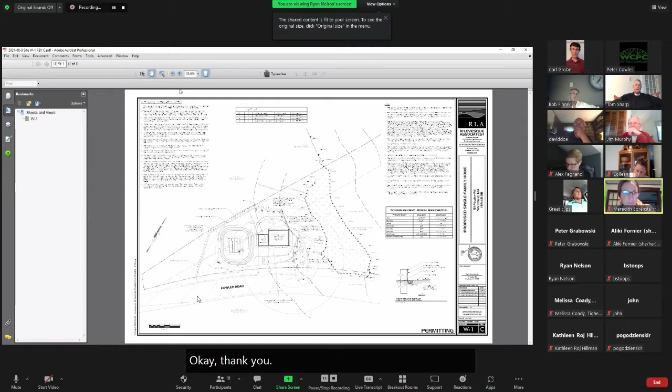with us. Sure. Hi, everyone. Ryan Nelson from R. Levesque Associates. I'd like to attempt to share my screen. I think I have to be enabled. You want it? Okay, thank you. Alrighty. As Meredith stated, a couple of revisions. I'll go over what has changed since last time.

We're showing proposed plantings within this 50-foot buffer zone within the existing hayfield. Those would be 2 red maple trees and then 5 winterberry shrubs. We're also proposing that birdhouses be installed along the 50-foot buffer zone to demarcate that area and its significance versus the rest of the yard area.

And then also boulders would be placed along the edge of field so that no future encroachment of clearing would occur beyond those boulders. And then we're also proposing that 2 conservation signs on posts displaying the typical Westfield conservation signage be installed, 1 here and then 1 here. Aside from that, nothing else has changed.

Ryan, just to get us back into thinking about this project, help me understand again, if you would, with your marker, show us the 50-foot line. Sure. Thank you. And now would you show us the silt fence line or the limit of work line? Limit of work would be hugging the 50-foot along here, and then the silt fence line is offset about 1 foot in front of the 50-foot buffer zone.

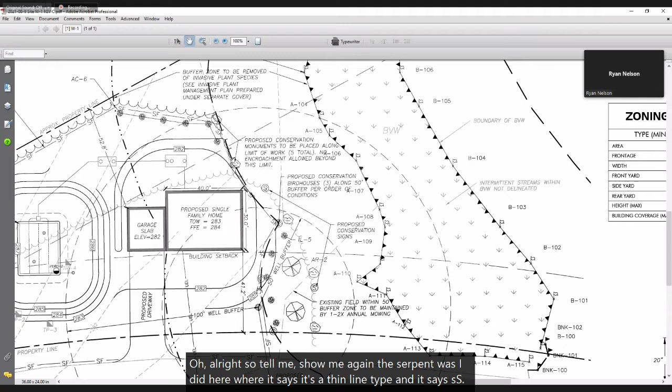I thought the silt fence line was that squiggly line to the right. This one? Yeah. No, that's the existing tree line, the existing edge of woods. Oh, all right. So show me again the silt fence. Right here. Yep, where it says, it's a thin line type and it says SF. All right. And Ryan, tell me again why it's necessary to be in this area. Why is it necessary to be in the 50-foot buffer zone?

Sure, a couple limitations. One being the septic system. This was the best site on the property to put a septic system. We're also very tight to building setbacks. This dashed line that comes to a triangular point here is the building setback based on the property lines. So we've wedged the house as far as we can to the left to fit within that. There's really no other place we can put the house.

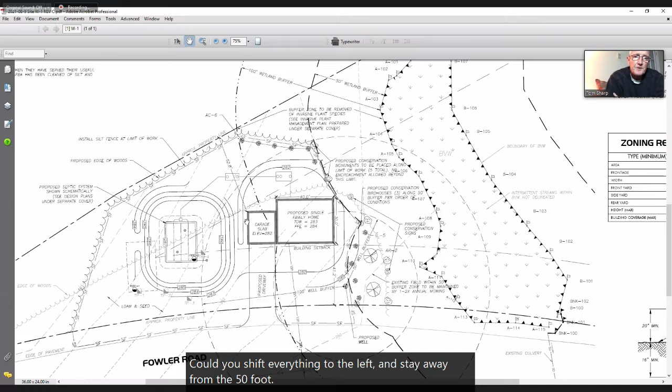I don't know much at all about septic design, but are there not systems that are smaller, probably more expensive, that would not require that amount of space? Could you shift everything to the left and stay away from the 50-foot buffer zone? No, because we run into this triangular shaped building setback. Well, first, go back to the first question. Are there systems that could have been designed that would take up less space?

And were they considered? Yes, I'm sure there are advanced systems that would have a smaller footprint. But I'm not so sure that would help us. None of the impacts related to the septic system are in the buffer zone. That's all outside and upland.

All right. And then in DEP's comments, he asked the question, is there already a home on this lot? And I think you responded that yes, there is. Are there already 2 homes on this lot? No, there's only one. Let me see if I can share a GIS image. Hold on.

So this is the field we're talking about right now, right here. So there's an existing house located here. There's a pretty steep drop off from this tree line down to the stream in the wetlands. So there's really no viable area to put anything on this side of the wetland. And plus that would be all tree clearing within the buffer zone in order to do anything over there.

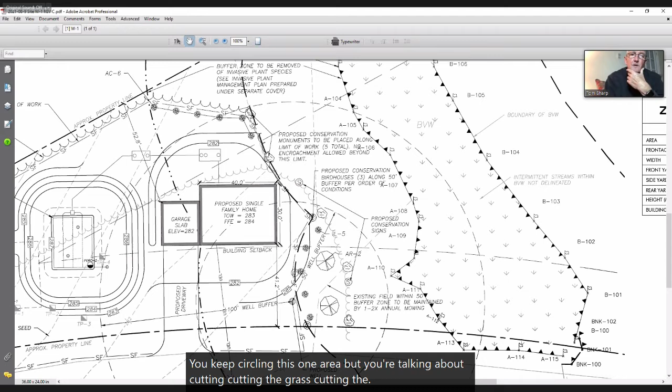And you or the new property owners would like to be able to cut this twice a year for the entire swath, right? All the way up to the top of the page? You keep circling this one area, but you're talking about cutting the grass, cutting whatever grows there. So down the existing field area within the 50-foot buffer zone. So if I was to draw it, it would be that area right there.

Why not the whole area? Why doesn't the homeowner have the same concerns with tall vegetation to the northeast of his property? This is existing woods, so this is beyond the limits of the field. Over here, this is all woods and will remain woods. Right. All right, I'll pause. Thank you, Ryan, for your answers. Sure, not a problem. Other questions?

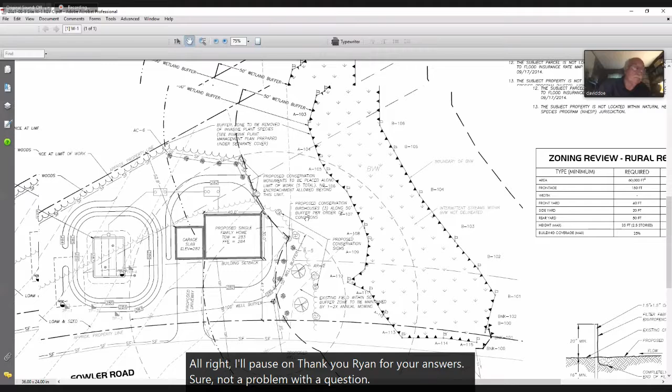I have a question, Mr. Chair. Yes. Ryan, why aren't the conservation signs along the 50-foot buffer? Is that because they want to continue to mow it? That's correct. Yeah, it would have some sort of conditional maintenance. I mean, we can put them wherever you guys like. It just seems a little confusing that we don't really want them encroaching on the 50-foot, but the conservation signs won't be on the 50-foot line.

But will the birdhouses be on the 50-foot line? Yes, that's kind of what I gathered from your email. That's what I was showing. So these markers with a C would be the birdhouse locations.

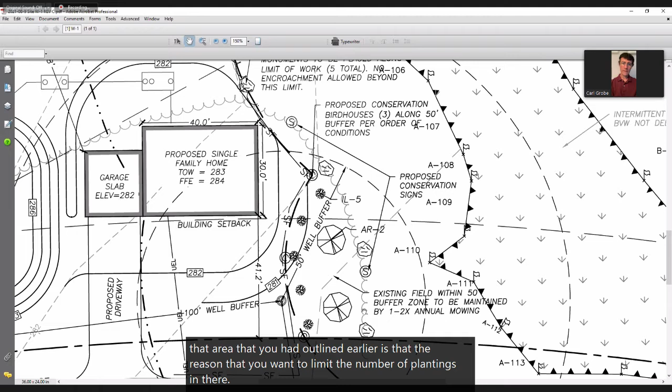I guess I had another question as well, if I may. I'm wondering, is the interest in mowing semi-annually that area that you had outlined earlier, is that the reason that you want to limit the number of plantings in there? No, I mean, it's not a very large area. If I was to give you a dimension here, 20.

It's about 25 feet across at the widest part and about 55 feet long. So that's about 1,375 square feet. And we have 5 shrubs and 2 trees. So I wouldn't call it sparse, but.

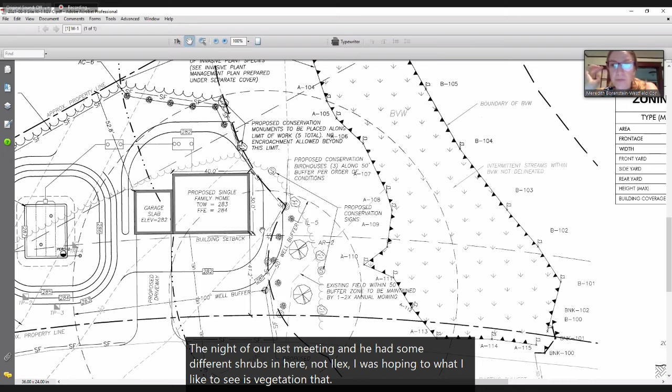Okay. What about the particular species that are in there? I know, Meredith, you had some thoughts on some other types of vegetation that might go in there. Yeah, originally, Ryan had sent this plan the night of our last meeting, and he had some different shrubs in here, not ilex. What I like to see is vegetation that is already on the site planted, not just a random wetland plant that may or may not do well on the site.

Usually if something is already growing at the site, then other plants like that will continue to grow, be okay there. Plus, I think it was serviceberry that he had in that area, and it just seemed like a lot of one type of species. So I suggested some others, and Ryan updated the plan, and now he has 5 winterberry shrubs and 2 red maple trees.

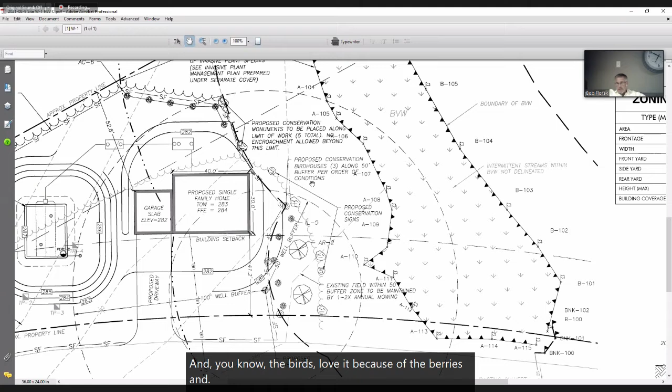Okay. So you're reasonably happy with that selection? Yeah, I think it's at least a little bit more diverse than just serviceberry. And again, Meredith, excuse me, as you get to the back, it gets more and more wet because the brook's back there. So as our discussion was, winterberry does real well in wet areas. And, you know, the birds love it because of the berries, and I just think it's going to work better. Yeah, and it's pretty in the winter.

My only other concern is the homeowner being able to find winterberry at a nursery. But I guess hopefully the contractor will take care of that for them. And my other suggestions were dogwood or elderberry, because I saw both of those out there when we did the site visit. Okay, other questions?

Hey, Alex, at our last meeting, when we kind of wrapped this up, it was your suggestion that perhaps shrubs be considered, and to the proponents' credit, thank you, they have been added. Alex, did you picture, when you were making that suggestion, or even now, that area being mowed or unmowed? I believe 2 weeks ago, you were thinking that it would not be cut, but I may not have understood. No, I think your recollection's right, Tom.

My suggestion was plant it, let it go back to the 50 foot as a compromise. If it's a low growth shrub, we didn't talk about the air circulation issue last meeting, but as long as it wasn't thick, mature forest, you wouldn't be totally suffocating the house. But no, I was envisioning that being the compromise. As was I. Because, you know, Ryan, the argument that it's mowed as a meadow now, great. Well, there's not a house there now either.

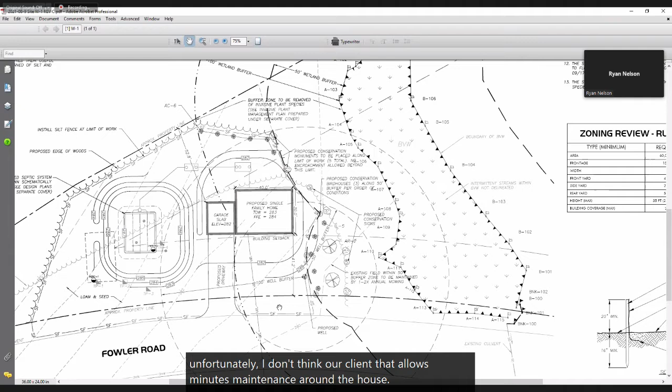Well, could he take the garage off then and slide the house over? I mean, where are we here? We're asking you to put some shrubs in. What's shown is as tight and as condensed as we can get for what he's looking to do.

All right, well I have a question then, Ryan. There are other options on the septic systems. Has he looked into that? Right, but that's kind of independent of the constraints of the house. We can't shift the house due to the building setbacks, not the septic system. You could shift it with a zoning variance.

Is that true? Can you get a variance on the setbacks? You can apply for one. Yeah.

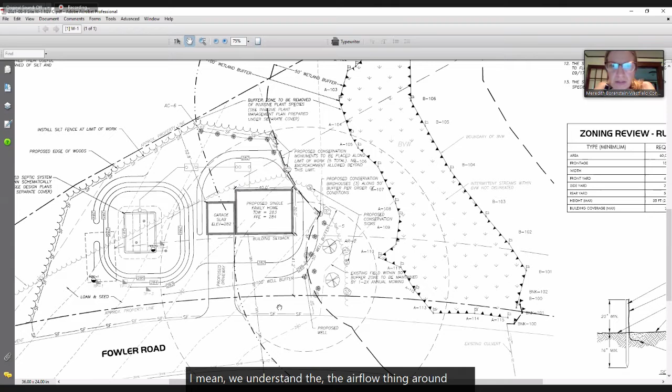I mean, we understand the airflow thing around the house. Wouldn't it be more of a concern that the back corner of the house is basically at the edge of a forested area? Yeah, and that's exactly why we're requesting to mow it one to two times a year, this strip right here. That's still within the 50.

And then this would be cleared. This is from 50 to 100. That's the existing tree line. So this would be cleared.

Ryan, one of the problems I've foreseen, and I think most of us agree, is that this area will be so hard to police. It will be so difficult for any of us, or our successors, or the people that follow us. It's just going to be unresistible - the guy's going to be out there with his tractor. He's going to cut this, maybe not the first year, maybe not the second year, but eventually I fear the boulders and the birdhouses will be ignored. It's so much clearer, so much easier if we just say stay away, keep 50 feet away.

That provides no confusion. I think it should remain natural, not cut twice a year. I would certainly feel more comfortable if that were done as well. It was my understanding as well that that area we keep talking about was in fact to go back to a natural state rather than being mowed twice a year.

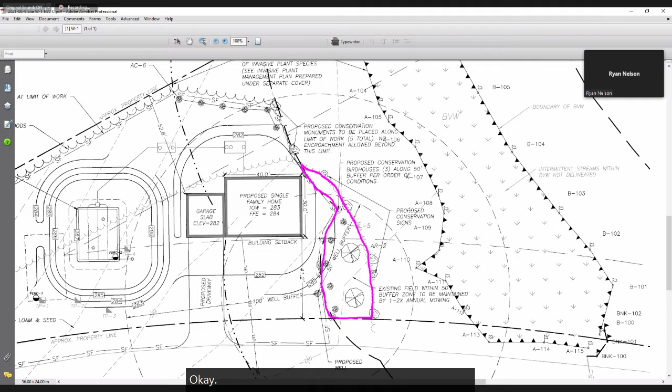Ryan, would you put with your colored indicator the area they wanted to mow again? Okay, now it looks like the most important area is up on the upper left, right next to the corner of the house. And then that remains pretty narrow as you go down to the right - you see a constriction there, and then it widens as it comes down on your paper.

To the commission, we're looking for some accommodation here. What if they were allowed to mow the small piece that goes up to the left, to the corner of the house, and then the bottom part - the larger piece from that constriction downward - just leave that one and not mow that. Because you can't have a hayfield within a foot of the corner of the house, and that doesn't seem practical if we're going to approve this.

I'm fine with that, Mr. Chair. I'm fine with that, Mr. Chair. Yeah, and we have to remember that this is still going to be vegetated. Right. I think we're getting some shrub plantings.

We could get more. I mean, usually if you were going to plant a whole area, wouldn't you divide the area by how much diameter each shrub would take up? So we could increase the shrubs, but like I said, ultimately this area is still going to be vegetated. I think we're still providing protection to the wetlands.

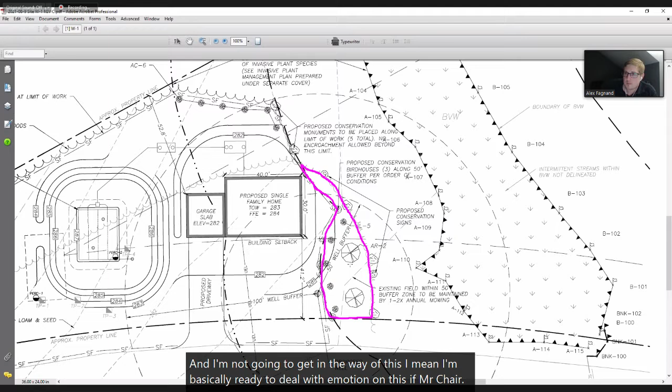I'm not going to get in the way of this. I'm basically ready to deal with a motion on this, Mr. Chair. Ryan, you can see where we're heading as far as the area that could be mowed and the other that shouldn't be mowed.

I understand what you're saying, but I'm not quite sure the logic behind it. We're improving existing conditions.

How do you mean that, Ryan? What's an improvement? We're adding shrubs and putting a limitation on how often it can be mowed. Right now, the farmer could go out and till this whole thing with no silt fence, no erosion controls. He has every right to do that.

The future use will not be doing that, with no house. I mean, come on, he's not gonna till that area. There's no way he's gonna till. We don't know that. He has the right to, I know, but he's not gonna do it.

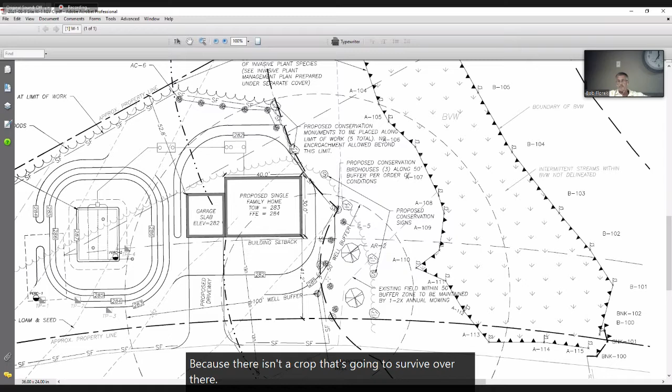Well, that's the same speculation as the future homeowner cutting beyond what he's supposed to. Because there isn't a crop that's gonna survive over there. No, that was just the worst case scenario.

Mr. Chairman, it sounds like we've got two choices. Either we ask Ryan to go back and redesign the area that'll be cut, take your suggestion, make it a much smaller, twice a year cutting up in that northeast corner, and maybe also give Ryan a chance to examine alternative septic systems.

Ryan, I don't understand why you couldn't slide everything to the left. You said there's something about setbacks. Tom, there's zoning dimensional setbacks where you can't place a structure beyond a certain distance from the front property line, side and rear property lines. So that offset projection is this dashed line and we're wedged in that sliver.

We can't go any farther to the left without encroaching. The northern offset, what is that? I understand you have to be so far from the road. What do you have to be so far from your neighbor's property? The rear yard, which is the rear property line, you have to be a minimum of 50 feet in a rural residential zone. So that would be this dimension from this property line to that offset, which is the building setback line.

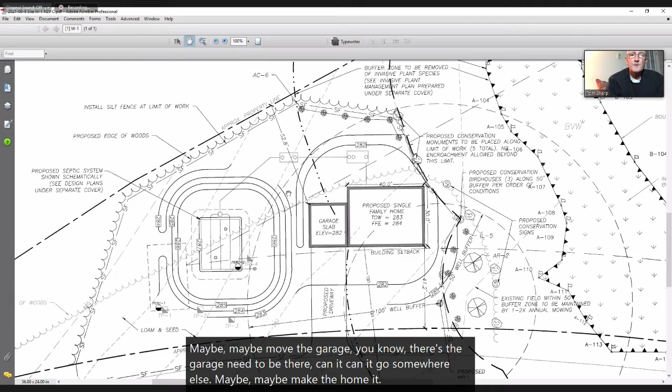Yes. All right, well, if you feel you've examined the septic thoroughly and it's not an acceptable alternative, then I'll agree with that. Maybe move the garage. Does the garage need to be there? Can it go somewhere else? Maybe make the home... it seems this could be resolved fairly easily.

I don't know why. Because the guy wants more lawn? Is that what we're talking about? He wants to have more lawn? We do this day in and day out with all these design factors. There's no other place to put this house on this property. This is the most condensed layout we can do. This is what we're proposing.

Is that city water or is it gonna be well? It's a well. The proposed well is located right here. Okay.

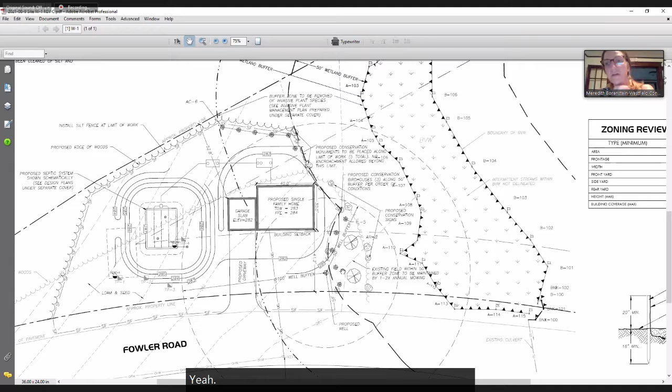I mean, we can approve it with special conditions, and I guess if the homeowner, Meredith, if that's correct, can appeal what we've set in our special conditions? Yeah, there's an appeal period. Okay, if they don't like what we permit.

Mr. Chair? Yes. Hey, I just wanted to say that with the garage, I know there was some concern with that, and they are maxed at that 52 feet for the rear line. If they did swap it to the other side, we actually wouldn't want that because it'll be closer to the buffer zone. They'll be right on the edge with the driveway.

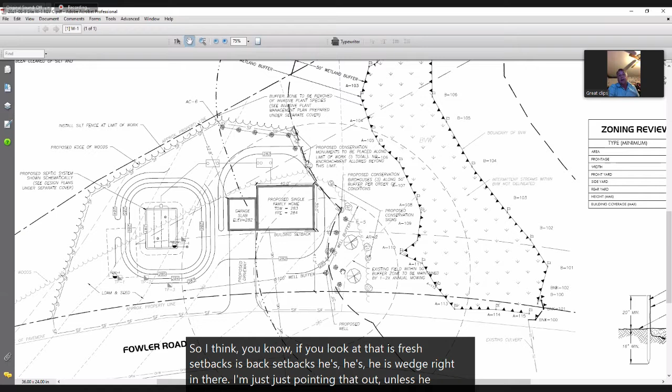You can have oil spills or plowing, you know, which would put it into the 50 on the other side of the house. So if you look at that, his front setbacks, his back setbacks, he is wedged right in there. Just pointing it out, unless he doesn't do a garage. But just pointing it out.

I think to the commission, we've gone as far as we can go, and it depends on what we want to set as conditions, and then again, the homeowner can agree with it, or they can appeal it and go from there. But I think we've discussed this enough. The house is where it has to be because of the setbacks on the property.

I agree, I totally agree. Let's move on. Okay, first, any comments or questions from the audience on this particular project?

Seeing none, I'll entertain a motion to close the public hearing. So moved. Do we have a second? I'll be the second. All right, any further discussion?

Seeing none, all in favor? Carl, yes. Tim, yep. Alex, yes. Bob, yes. Cliff? Yes. I'll vote yes as well. I'll also vote yes to close.

Okay, thank you. Meredith, why don't you go through the conditions. I'm not sure if I can get them up on this laptop.

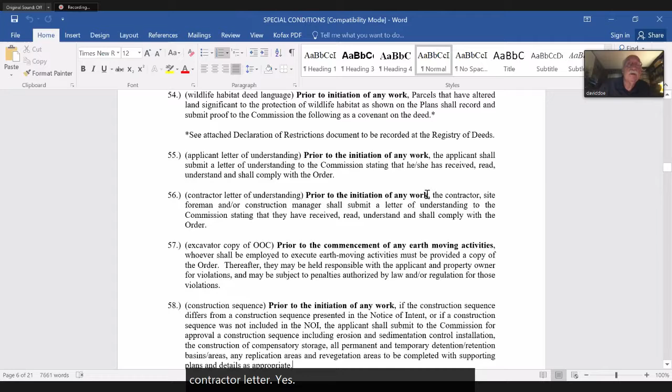Excavator copy, yes. Construction sequence, yes. Erosion controls, number 59, yes. Pre-construction meeting, yes, probably important, that's going to be important with this one. Let me keep going. Emergency contact information, yes. 48-hour notice, yes.

There is a septic system, so the Title V should be submitted, correct? Yes, we will need, I think we can ask for an approved septic plan. Okay, what they have on there is just where they're proposing it, it's not the actual septic design.

Okay, so yes, there's no water quality certification for this one, correct. Permanent markers, as indicated on the plan. Now, there was a question about the boulders being off the 50-foot line. Is that acceptable to the commission? Do you want to put them on the 50-foot line?

I think they should go on the 50-foot line. I agree with that. Okay, so make a notation, that's different from what's on the plan.

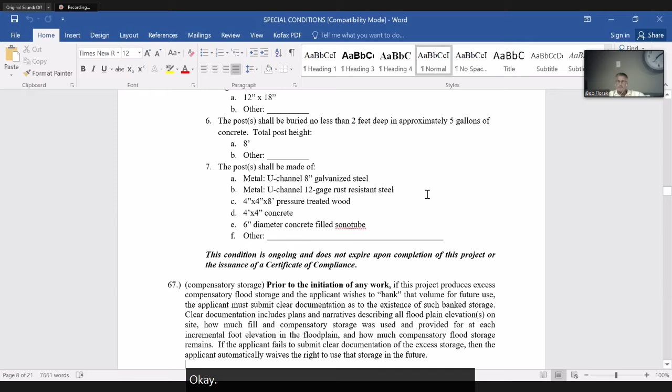There's no comp storage, no basins. We might circle that just because they might need to do that during construction to manage stormwater, but it's not required. Okay, so circle 68 then.

So, tag trees, they're not tagging trees, are they? Well, they're clearing up to the 50-foot line in the back where it's currently forested.

We could either do that by putting the silt fence in ahead of time at the 50, and I could approve it that way, or let's do tag. Okay, I'll just make a note. The limit of work is the silt fence line, so they don't need to tag every tree, right.

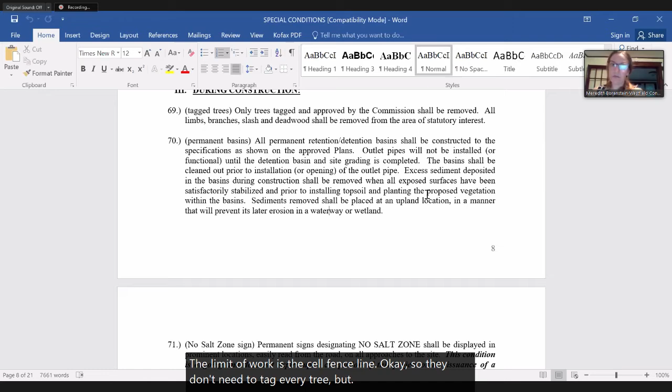So, no permanent basins. No salt, I don't think that's needed, this is a pretty small driveway and single family homes are exempt from stormwater standards. All right, so we don't have to worry about low flow either, so none of that.

I don't know, liquid fertilizer, you're not inside the buffer zone, well, right? They're in the 100-foot buffer zone, the whole house and lawn will be in the buffer zone. So how about we limit, I mean, we can say no lawn fertilizer. I don't know, there's no way of me preventing that, but that's not enforceable, but keep it outside the 50. Yeah, okay.

Okay, erosion controls, straw bales only. Installation number 75, yes. Stockpile 76, yes. Avoid heavy rain, yes.

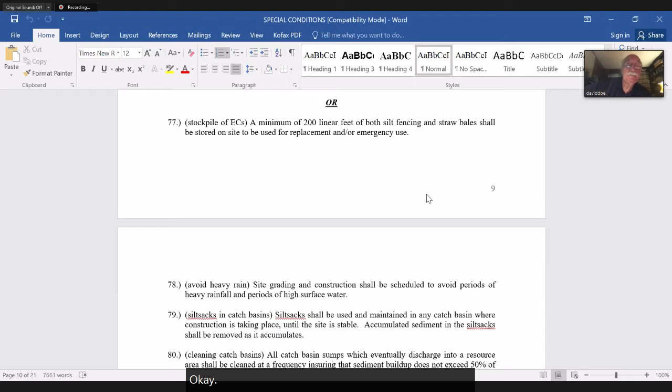There's no catch basins, no. Okay, no grease, oh sorry, no grease traps, no. Okay, there's no stormwater structures, no. Okay, so just keep working.

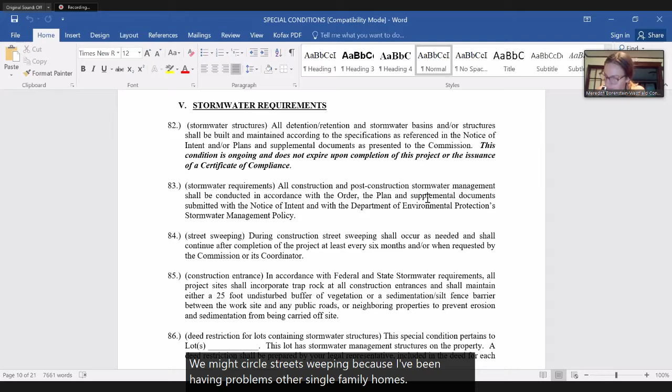We might circle street sweeping because I've been having problems with other single family homes, but that's normal construction practice to keep sediment in the limit of work. Okay, look at that one.

And they should have, I don't think that I saw that on the plan, they really should have a construction entrance, especially if they have to bring a lot of soil in for the septic. Okay, let's do that one too.

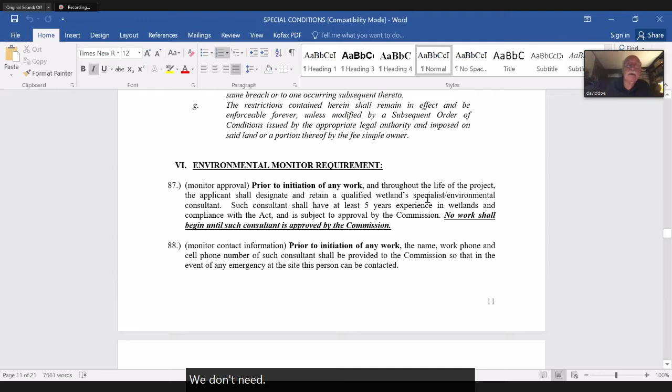All right, there's no formal stormwater structures, we don't need a monitor. There's no dewatering, we hope not. No dredging. There's no replication.

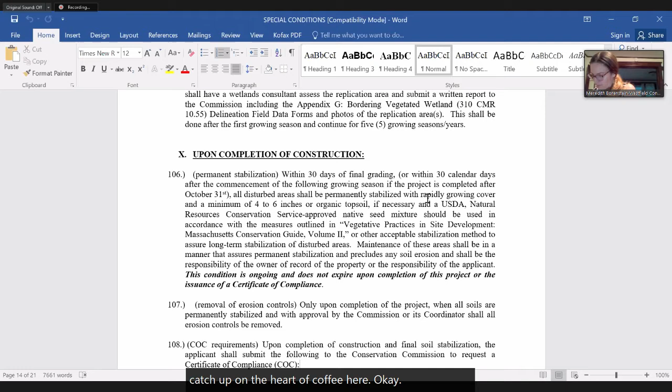Stabilization, yeah. We want that. Hold on. Let me catch up on the hard copy here. Okay. Okay. Oops. 107, yes. 106, yeah. 106. Yep. 108, yes. Okay. Future buyers, yes.

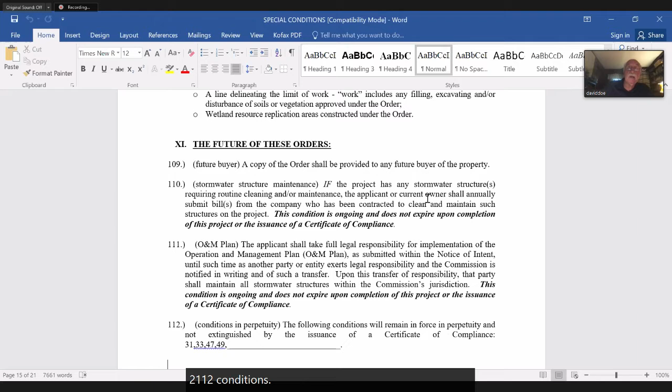Okay, stormwater structures, we don't need that one. We don't need an operation and management plan, do we? No, because that's usually for stormwater management. 112 conditions in perpetuity, yes. Yes. Okay, and a bond?

Jim? Well, I'm going to defer to you folks because you're more aware of the project than I am, and I was also not at the last meeting. So I really can't contribute on this. I always like to try to go backwards when we're trying to think of a bond and envision what it would cost the city to fix things if things got messed up and everyone walked away from it. In this case, I don't see much that could happen bad.

You know, he is taking trees down within the 100 foot. So maybe he goes in there and cuts a dozen trees and goes belly up or decides to build a house somewhere else. We'd want to at least try to replace some of those trees. So I'm thinking something nominal, Jim, maybe like $2,000-$3,000. I don't know how the rest of you feel about that. It may be too low. 3 sounds okay to me. How about the commission?

Yeah, I guess to pitch in, the only other sort of bad thing could be potentially digging the foundation and laying the foundation in and then walking away, in which case you'd need to remove the foundation. I don't know if that adds to it significantly or not. How about 4 then? You're right, Carl. You're right. We would want to do that because it is within the 100 foot buffer.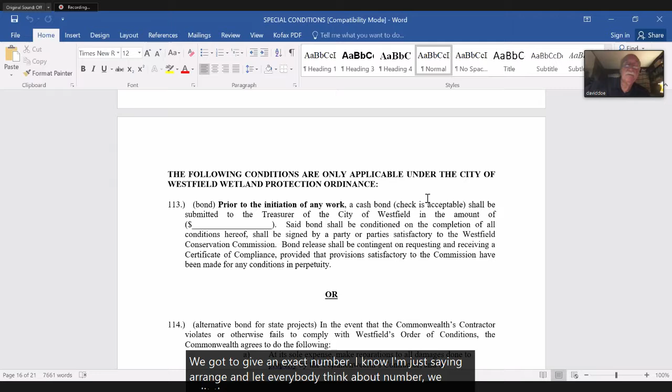How about a 3 to 5 range? Well, you got to give an exact number. I know, I'm just saying a range and let everybody think about the number. Oh, you split the difference at 4. 4 sounds all right to me, yeah. I'm good. Okay. All right, so that'll be 4, Meredith. Okay. Then we've got, you indicated some special conditions.

Yes, I was going to suggest, you know, if they're going to be doing herbicide treatment out there for the invasive species work, that I meet with them and we get a name and contact number. You know, it has to be a licensed professional to do that type of work. Okay. And I did take this from the invasive species plan that LeVec provided. So maybe we can just reference that the invasive species management plan will be followed. Okay, and I can include it in the order. All right, thank you. Okay, any other conditions from the commission?

Are we approving this with no mowing within the 50, except, how do we word that around the house? So I'd be okay with periodic mowing around the house, but the larger chunk within the 50 that we're planting trees and shrubs in, I would like to have left alone. Okay, I think that's what the commission was looking at. As Ryan drew it, there's a narrow region up near the house, and then it comes to a sort of a neck, and then as you move towards the road, it widens out. And I think from the neck south is the region we want left alone after they put in the shrubs and the trees. Mhm.

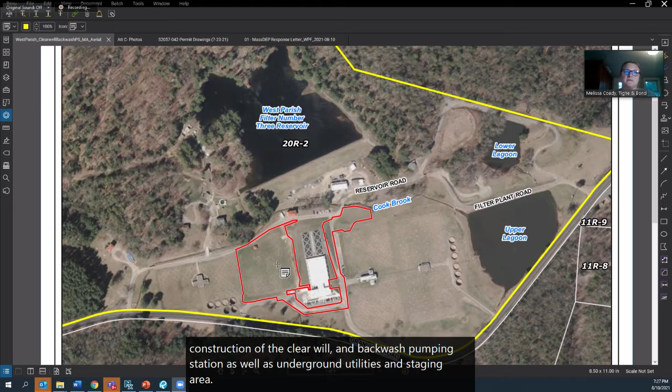So again, to orient the commission, Cook Brook is the wetland resource area that flows through the site, a perennial stream. It typically flows into the upper lagoon and then down into the lower lagoon before it discharges from the site and returns to its stream channel. So within the site and within the proposed limits of work, we have work within the 200-foot riverfront area of Cook Brook, as well as the 100-foot inner riparian zone, which overlaps in this vicinity with the 100-foot buffer zone as well. So anything described in the buffer zone is within the first 100 feet of riverfront area.

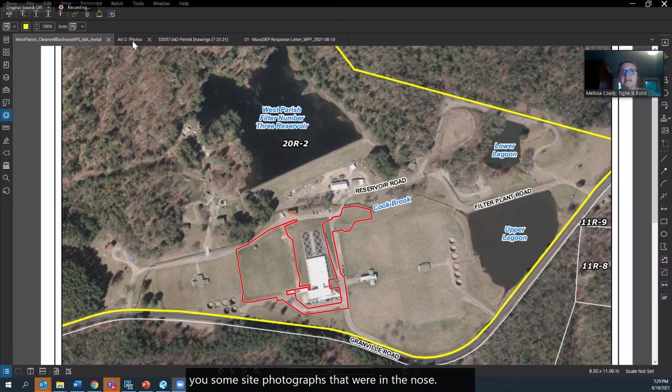And as the commission is familiar, this is a historically developed property. It's been well over 100 years that it's been developed and in service as a drinking water treatment plant. And as Bob described, this is providing service to roughly 250,000 people. So critical infrastructure is an accurate description. So we'll do some site photographs that were in the notice of intent just to give that particular view, and then I'll go to the project drawings to talk about the proposed activities.

So this is an existing paved access road. I'm going to bounce back here. So this is right here. And this little brown square is this building right here. And that's the existing stairwell building that is going to be demolished. And this, what appears to be maintained lawn with all these manhole covers in it, is actually the top of the sand filter beds. And that's this area here. These beds, as Bob described, were taken out of service in the early 70s when the rapid sand filters were constructed. The proposal includes demolishing the entire area, the entire beds 1, 2, and 3.

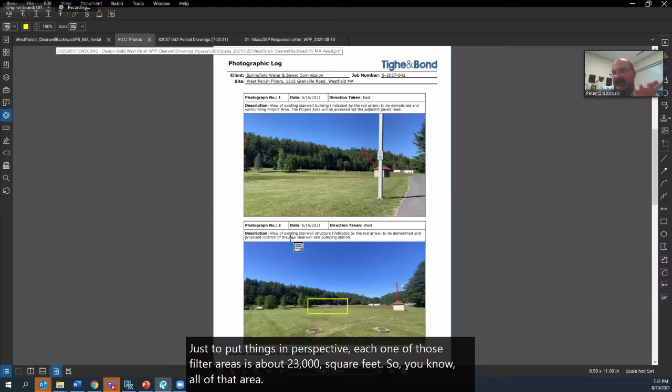So what you don't have an appreciation for, and I certainly didn't before this project, was that about 18 inches below the maintained lawn area is the top of the concrete structure. So it's not natural native soil beneath this. It's man-made infrastructure. It's generally impervious, and those concrete structures are filled with sand, which was the filter media. And just to put things in perspective, each one of those filter areas is about 23,000 square feet. So all of that area that consists of those 3 old filters takes up quite a bit of area that's impervious after you get below that 18 inches of green roof. Thank you, Peter. Okay.

And then this area here is maintained lawn with underground utilities, and that is roughly this area where the contractor has identified a need for staging. And then what you see outside resource area is where the clear well and backwash pumping station will be constructed, as well as piping, the linear pathway for piping and connections to the building here.

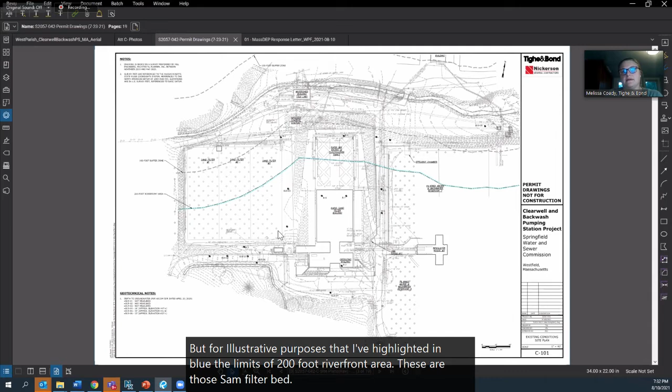So I will jump to the permit drawings. I think the aerial photos make it a little easier to appreciate where you are on the site. But for illustrative purposes, I've highlighted in blue the limits of 200-foot riverfront area. These are those sand filter beds that will be demolished. This is the existing rapid sand filter building, and Cook Brook is this feature on the drawings here.

Okay. That's a sheet layout. So again, this just demonstrates the limits of demolition and erosion and sedimentation control barriers. So as you can see, aside from an erosion control barrier on the far side of the existing paved access road, work is limited in this area to the south side of the existing access road. And again, this shows the limits of excavation or disturbance to construct underground utilities. And the staging and laydown.

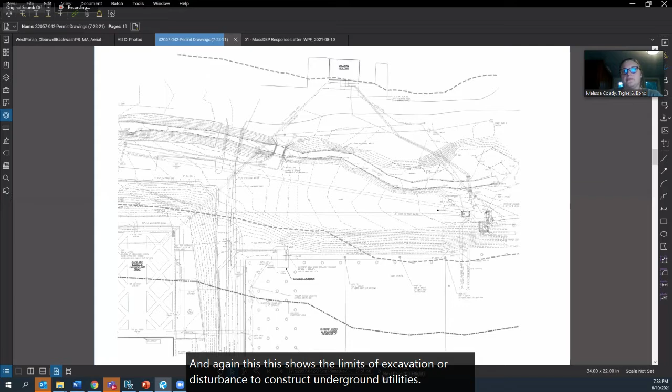And I would just like to get to this drawing here, which shows the clear well and backwash pumping station. So as you can see, this line highlighted in blue again represents the limits of 200-foot riverfront area. So the building has been sited outside the 200-foot riverfront area. And the entire footprint of the sand filter beds is within this vicinity. Those will go from being essentially impervious to pervious.

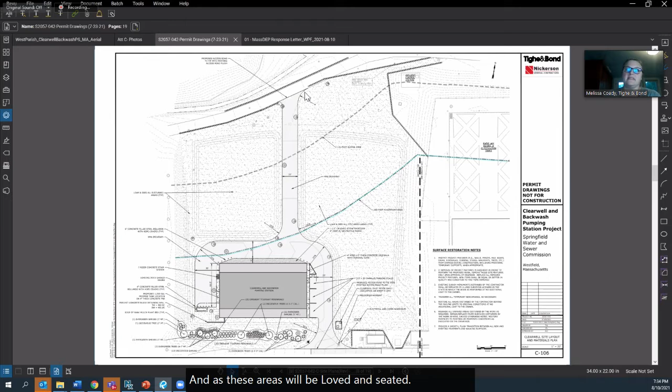So the project will have a net decrease in impervious area. And these areas will be loamed and seeded. But there will be access paved to come in so that there is loop access here. Thank you.

If we could, I just would like to touch on the riverfront area improvements that are proposed. Thanks. As well as the stormwater management system, which is an underground infiltration system at the end of a pre-treatment train that includes a proprietary stormwater unit as well as deep sump hooded catch basins. So the project qualifies as stormwater redevelopment, which, as the commission may be familiar, requires that standards are met to the maximum extent practicable. In this case, the standards were completely satisfied.

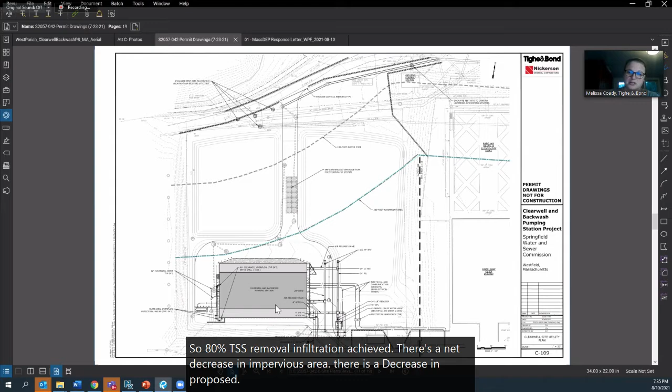So 80% TSS removal, infiltration is achieved. There's a net decrease in impervious area. There is a decrease in proposed peak discharge rates for, let me get this right, the 2, 10, 25, and 100-year storms. And there are no new point source discharges, so they're tying into the existing system.

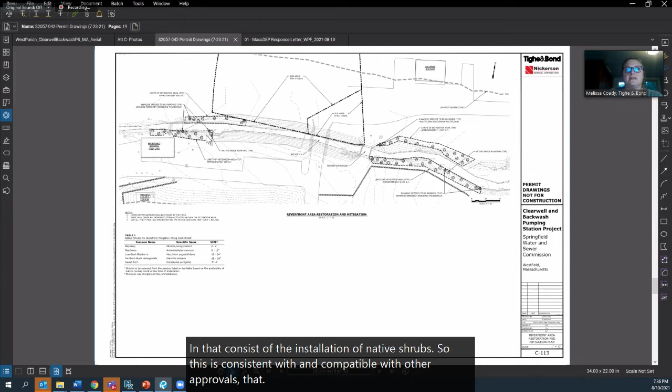Apologies, it'll take me a moment here to advance to the riverfront area. So consistent with previous projects that the commission has reviewed, we are proposing riverfront area improvements adjacent to Cook Brook that consist of the installation of native shrubs. So this is consistent with and compatible with other approvals that the commission has reviewed and approved in the past, and does not overlap with any previous areas that the commission has reviewed and approved.

So I guess. Thank you. Thank you. Questions from the commission?

It's not really a question, David, but I wanted to, I don't know if Bob is even still there, but... I'm still here, Tom. I meant the other Bob, the applicant. Yes, sir. Yeah, thanks for hanging in there with us though, Bob. The applicant, Bob, and Peter, we have worked with them before. And of course, we all know Melissa. I have great confidence in the integrity of all three of these people. So that's just a comment. All right, thank you. Thank you.

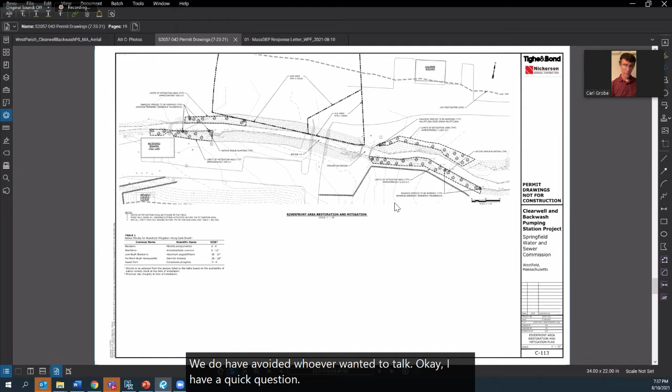We do have some, well, go ahead, whoever wanted to talk. Okay, yeah, I had a quick question, I guess mostly to Melissa. What's going to happen to the material that gets demoed and then presumably removed? Where is that headed? So the material from the sand filters, it's uncoated concrete and sand filter media, and that is going to be managed on site within this footprint under a beneficial use determination from Mass DEP.

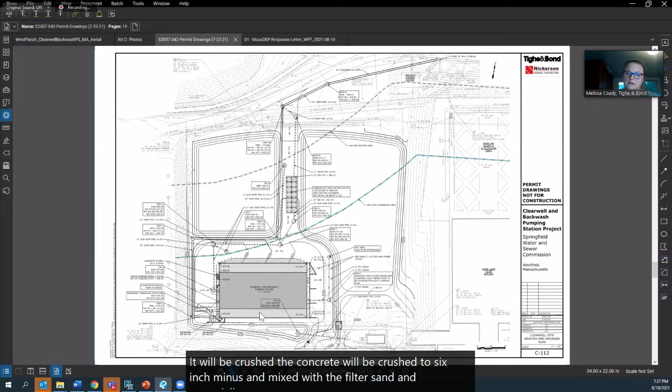So it will be crushed, the concrete will be crushed to 6" minus and mixed with the filter sand, and essentially will no longer be considered impervious in that area. Okay, all right. And that approach will also be consistent with being a more sustainable site and minimizing truck traffic coming in and out and bringing materials. So that's the approach that the commission and the design build team thought would be appropriate, to recycle the material, use it on site, eliminate it from taking off site. And we've done all the analysis associated with that material as well to get that beneficial use determination. And thank you. Okay, thanks.

Melissa, we do have the DEP comments. Can you address those? Sure. Absolutely. So DEP Western Region issued comments assigning file number 333808, and some of them are consistent with what we've seen in the past, and I think I would consider them more straight comments for the purposes of information and sharing and awareness, not necessarily anything specific to compliance.

So the first comment is that Cook Brook has been identified as a cold water fishery resource, and that is correct. Mass DFW has identified this as a cold water fishery resource, and the project will incorporate best management practices during construction to protect water quality, minimize erosion sedimentation. And in the long-term effect, this will actually have a beneficial impact on the volume of stormwater runoff, as well as treatment quality prior to discharge to Cook Brook. So I think the scope of work adequately addresses protection of that cold water fishery resource.

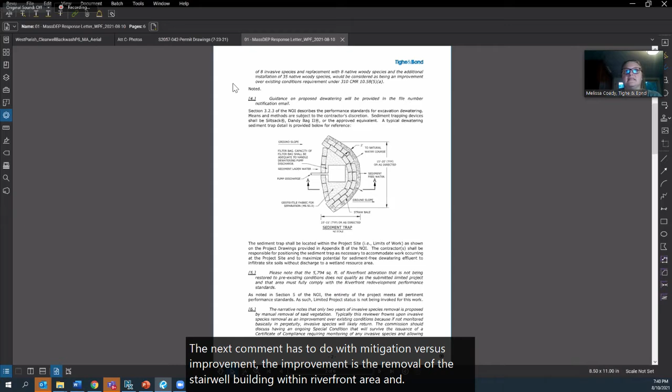The next comment has to do with mitigation versus improvement. The improvement is the removal of the clearwell building within riverfront area and installation of native species. So there's a net improvement to riverfront area. As the commission is aware, this is a site that was developed long before riverfront area existed as a regulated area, and the project will not encroach closer upon riverfront in this site.

The next comment has to do with providing guidance on proposed dewatering. So we anticipate that some, though not much, groundwater may be encountered during construction. However, the contractor will be required to provide adequate filtration treatment prior to discharge, and that discharge will be overland and allowed to naturally infiltrate. There will be no direct discharge to Cook Brook or other resource areas.

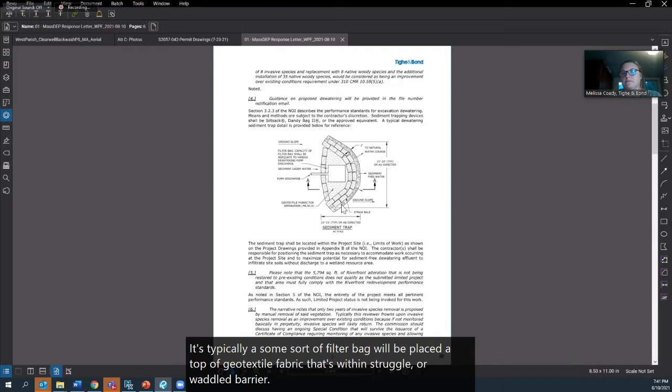This is a standard detail for a sediment trap. It's typically some sort of filter bag placed atop a geotextile fabric that's within a straw bale or wattle barrier. So the filter bag acts as the first level of filtration. And then there are multiple other filters that dewatering effluent would have to discharge through. So it both slows the velocity and filters sediment, and that facilitates infiltration outside of resource areas. And that would be placed within the limits of work that are shown on the drawings that were provided to the commission.

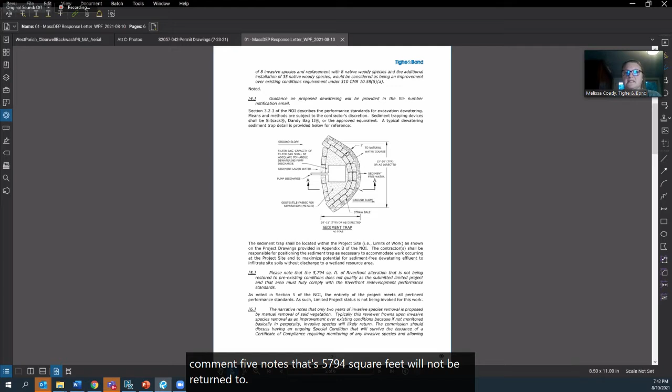And then lastly, a comment regarding invasive species removal. Our response is that within the footprint of these proposed native shrub planting areas, invasive species will be removed prior to the installation of the native plantings. And then the areas will be monitored for a period of 2 years, consistent with past permits. And during that time, if additional species management is required, it will be implemented as part of that monitoring.

And lastly, Mass DEP recommends that the commission consider waiting until the Secretary of Energy and Environmental Affairs has issued a certificate. And we acknowledge that that is not a requirement of the Wetlands Protection Act, but that is a comment that the reviewer has made. All right, thank you.

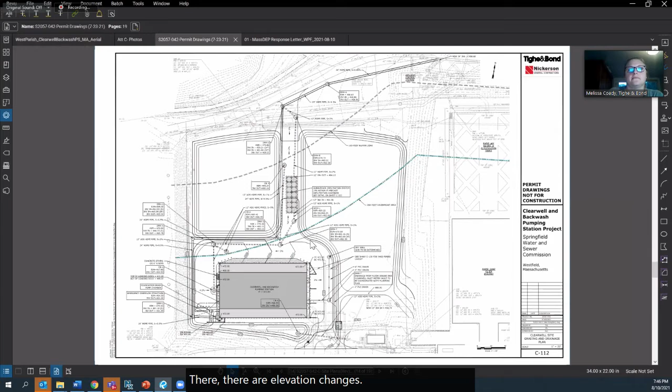All right, thank you. Meredith, you had some questions? I have, well, one question. The laydown area, I noticed that's really close to Cook Brook. Is there any way that could be moved to the front, outside of Riverfront area? I wasn't quite sure what was going to happen there. Go back to the aerial again, because it's easier to appreciate relative to the rest of the site.

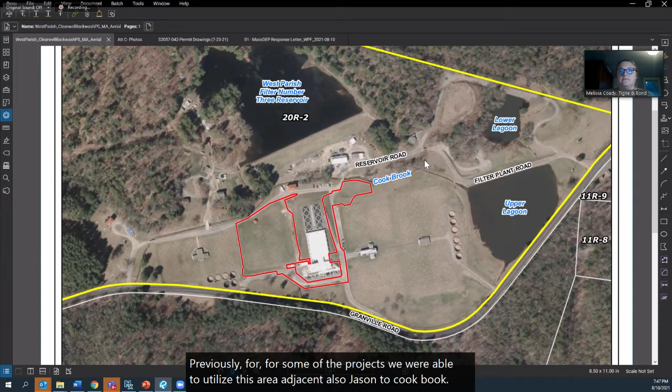So one of the constraints and considerations during design is that the facility has to remain fully operational. And so the logistics of siting this with existing topography and proximity to the limits of work, it's quite constrained in that sense. It's very constrained for a large site. Previously, for some of the projects, we were able to utilize this area adjacent to Cook Brook to the east. Elevationally, this area here is significantly higher. We also wouldn't want to site it on top of existing sand filters or clear wells.

Melissa, if I could add a little bit for clarification. Thank you, Bob. In response to, I think Meredith asked a question. I'm pointing at it with my mouse, and it's doing absolutely no good. Where do you want me to point, Bob? To the existing filters, the three that are going to be demolished. Contractor intends to, once that's demolished and they've used that fill as described in the BUD permit, they actually intend to use that area primarily for the laydown area.

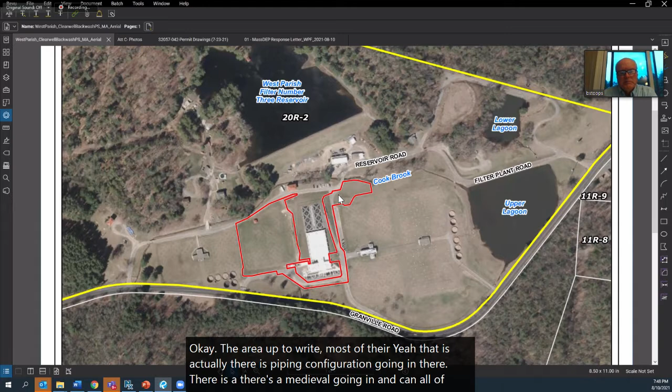Okay, the area up to the right, Melissa, that is actually, there is piping configuration going in there. There's a meter vault going in, and all of our transmission mains are already there. There's 3 transmission mains in that area, and we need to tie back into those 3 transmission mains. So there actually is construction in that area. There is a little bit of lay down, but it's primarily a construction area, and the majority of the lay down area is going to be in that disturbed area where all the demolition is taking place. I don't know if Pete's still on the line, but he can confirm all that. I think I'm representing that correctly. Yeah, I think you are, Bob.

Yes, and the other part of it too is if you look over towards the east, that's where all the transmission mains run through as well. So we want to avoid stockpiling material on there and having construction vehicles go on there, because otherwise we have to distribute the load so that we don't damage one of those main transmission mains. So we're a little bit restricted because of elevated clear wells, slow sand filters, as well as the transmission mains that run through the site, because there's a lot of piping corridors that we need to really avoid. And then the other piping corridors we need to modify and connect. So we're really limited on the space of where we can put stockpile material.

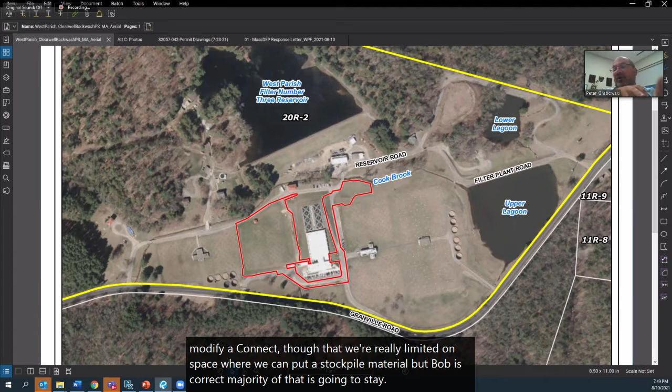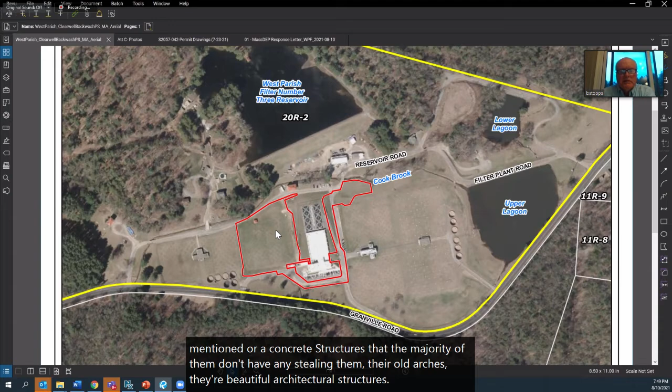But Bob is correct. The majority of that is going to stay at that crushing operation with mixing with the sand, as well as the excavation within that old area where the pointer is right now. Yeah, all those rectangular areas that look like grass, as Melissa mentioned, are concrete structures, but the majority of them don't have any steel in them. They're old groined arches. They're beautiful architectural structures underneath the ground, but they're very susceptible to collapse if you put any large single live loads on them. So you really can't drive large trucks on them or pile dirt on them. It's just not feasible.

Will the new filter beds have a concrete cover like the current ones you're taking out? The new facility is a tank. It's a clear well tank. Okay. We're not putting in filters under this particular project. Okay, so it's one big tank? Yeah, and the pump station's on top of the tank. Okay. And how far below grade will the tank top be? Pete, you know that. Yeah, the tank top will actually be right at grade, right?

And then it's gonna go down to about an elevation of 455, with a little haunch section that's 3 feet below it for pumping. So it's gonna go down below grade, probably about 20 feet or a little less, thereabouts.

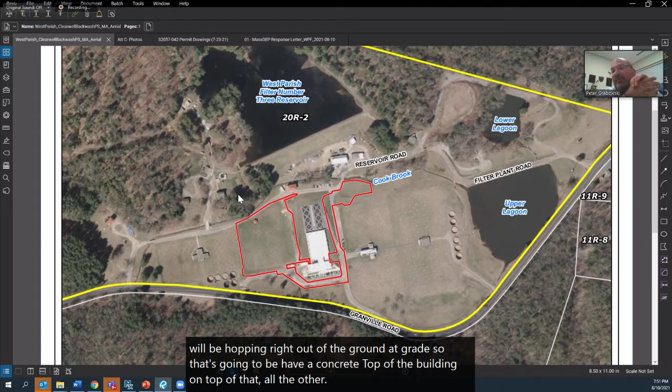Will the entire site be loamed and seeded like it is now? Yeah, the tank will be popping right out of the ground at grade, with a concrete top, plus the building on top of that. All the other area will be loam and seeded, except where the new access road will go to allow vehicles to travel through for deliveries, since sodium hypochlorite is stored in there. If pump maintenance is ever needed, a vehicle would need access to load and remove the pumps. So that's the plan as we have it laid out right now.

All right, thank you. Any further questions from the commission? Seeing none, any questions or comments from the audience concerning this project?

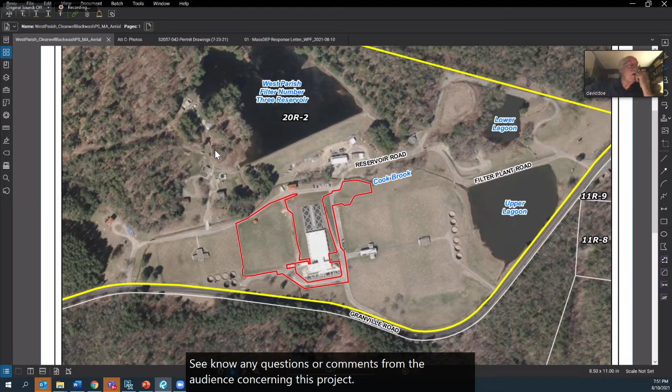So I think Meredith and Melissa can arrange a site visit within the next two weeks, and we can continue this on August 24th and hopefully finish it up at that time.

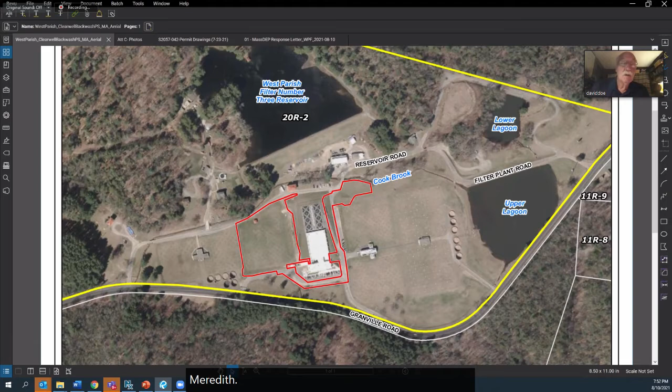Anything else, Melissa or Meredith? I would just wonder, do you anticipate having draft conditions to discuss at the August 24th meeting? Special conditions? I don't know, I guess it depends on what we see out at the site. We can discuss these once we continue this until the next meeting, right, as a commission.

Yeah, and I was awaiting the city engineer's comments on the stormwater piece of it. That was another reason we were thinking continuing would be beneficial, and then we could look at the site and make sure we're understanding where everything's occurring. I'll just offer for consideration that as part of the development of the stormwater management plan, we did coordinate with the assistant city engineer, Jeremy Siegel. We went through and talked about the approach and the assumptions being made as part of the HydroCAD analysis associated with looking at the stormwater runoff as part of that plan. So we did that pre-coordination as well.

All right, do you know where the city engineer stands with their review? Have they reached back out to you? I haven't heard anything back. I sent this to them a couple weeks ago and received the notice. Okay. And I know he's on vacation, he's been on vacation, so I think summer is getting in the way of some progress.

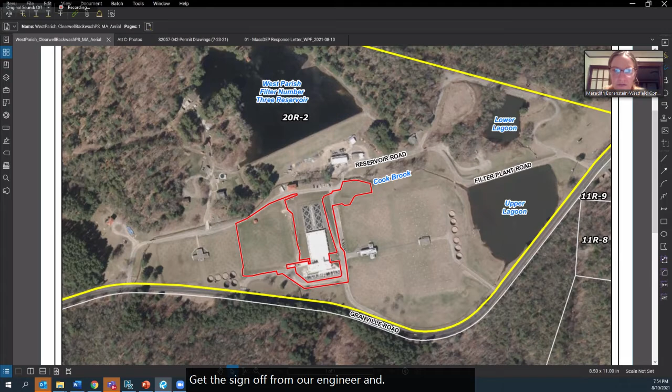But there's no major cause for concern. I think it's just our normal practice to look at the site, get the sign off from our engineer, and I don't see many red flags as far as wrapping it up next.

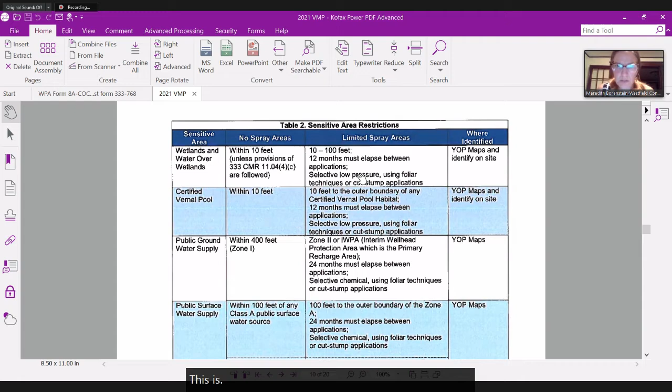Let me share the vegetation management plan. Let me see what page this is. So there's a vegetation management plan and then a yearly operation plan. It talks about controlling vegetation - again, it's like a general plan, it doesn't really say where, but this is what they have for working near wetlands.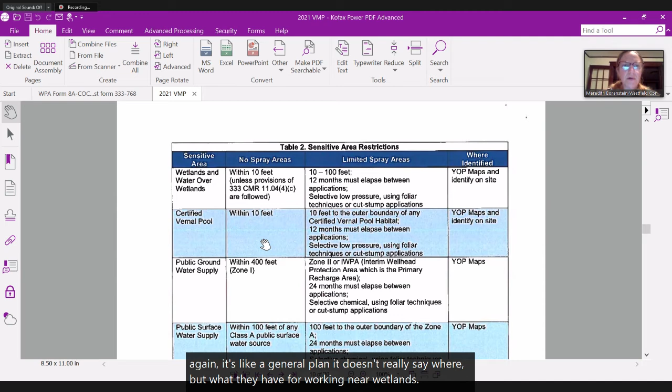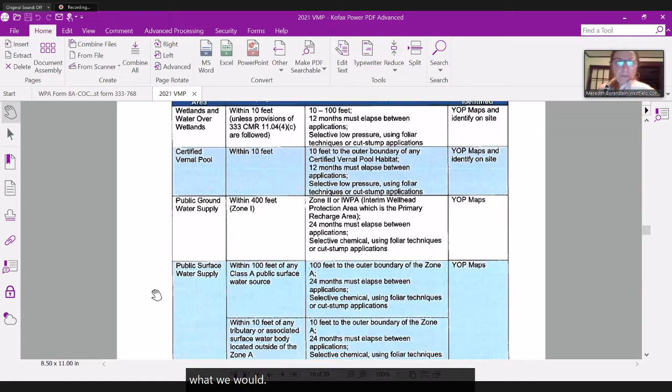And public water supplies, vernal pools. So, yeah, this is kind of outlining what we would be permitting down there. It's basically - it says 10 feet off of, 10 to 100 feet from a wetland.

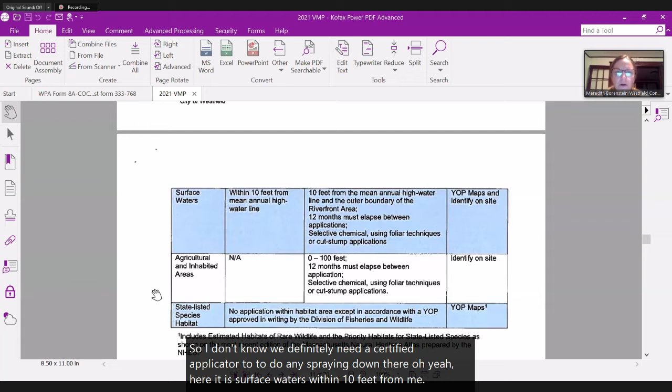So we definitely need a certified applicator to do any spraying down there. Oh yeah, here it is - surface waters within 10 feet from the mean annual high water line. And then it outlines what they would do there: selective chemical use or cutting and stumping. And it says you can only do it once a year.

Have the herbicides ever been used at Whitney before? No, just mowing? They weren't even doing that. When I got there, I couldn't believe it, it was such a mess. It was huge, plus all the leftover Japanese knotweed from year after year, that biomass just got so huge down there. It really needs to be addressed.

I was looking at - I found some pictures of Whitney way back in the 70s, and it was really impressive. I said, God, that's what spurred me on to say, hey, let's try to work on this and see if we can get it back, because otherwise people have no place to go except the ball fields. That area would be nice for them to use safely, because there's a lot of trees that need to come out of there too.

So you would remove the knotweed manually or with machines, then cut it, and spray the stumps that are left behind? Is that right? Well, actually with knotweed, the best time to spray it is around September after it flowers.

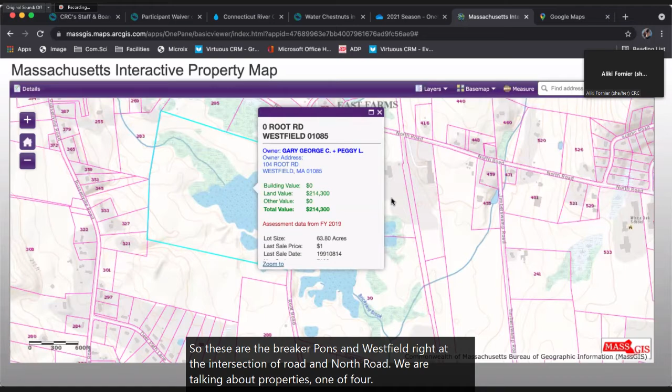So these are the Brickyard Ponds in Westfield, right at the intersection of Root Road and North Road. We are talking about properties 104 Root Road, 405 North Road, and 30 Medeiros Way. This work has been going on for several years, and thanks to the participation of Cynthia Bettner, Jeff Bettner, Liz Hall, and her son Philip Hall, we've been able to control the growth of the water chestnut in that water body. And we'd like to continue these efforts for the next several years through pulls via canoes and kayaks.

I should give a bit more information about the water chestnut plant. It's an invasive that was introduced in the 70s, I believe, as a decorative plant in Cambridge, Massachusetts. And it quickly spread via wildlife mainly, but also via motorboats to the rest of the East Coast and can now be found in Georgia all the way up to Canada.

This plant grows multiple rosettes. The one seed may grow multiple rosettes, and each rosette can grow about 10 seeds, and each seed is viable for 12 years. So not being able to pull every single plant from a water body can create another load of work for another 12 years, essentially. Which is why it's really important for us to keep going out there and keep pulling plants every year, making sure that we get every single one of them. Thank you.

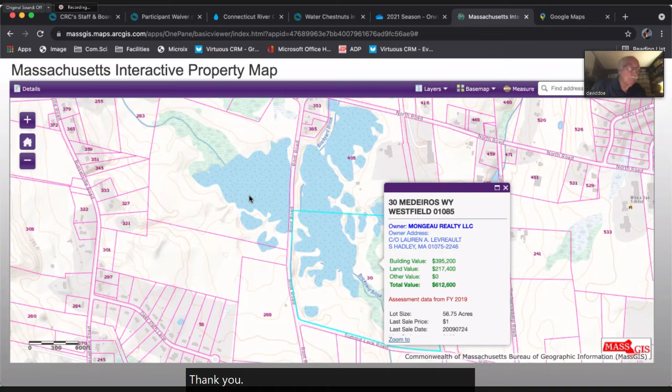Questions from the commission? Aliki, specifically when we talked about this project 2 weeks ago, the chairman requested documentation that CRC has insurance for projects like this, and that volunteers sign waivers. Can you give us that assurance tonight?

Yes, absolutely. So what happened is we were contacted by the 2 landowners, as you can see here on these pictures, considering they were having concerns regarding what the liability was around the activity on their property. And so we are able to add them to our insurance coverage, similarly to how we'd add an event venue to our insurance coverage to cover for liability and property damage. And so that's what we're able to do.

And once this process is done, every participant who goes to these properties to do the said activity is asked to fill a liability waiver, essentially waiving all liability from the property owners and the organizations and the leaders involved in said activity. I have here the participant waiver we ask all our volunteers to sign. This language can be found on our website at ctriver.org/waiver. It's pretty straightforward, and this is what we have all volunteers and all participants sign before their participation in an event or volunteer activity.

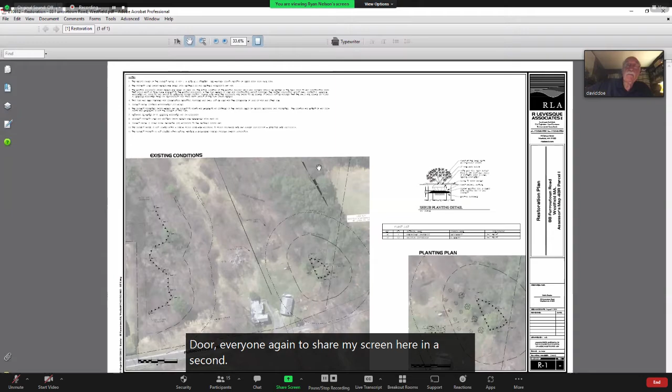Okay, thank you. Item 5, enforcement, 88 Furrowtown Road. Ryan, you're up. Sure, hi everyone again. Attempt to share my screen here. Give me 1 second. Okay. So last time we presented the existing conditions we found. There's a wetland located well away from the subject lawn and work area, located off-site here. But the more relevant resource area is an IVW surrounding an existing well, the boundary located here.

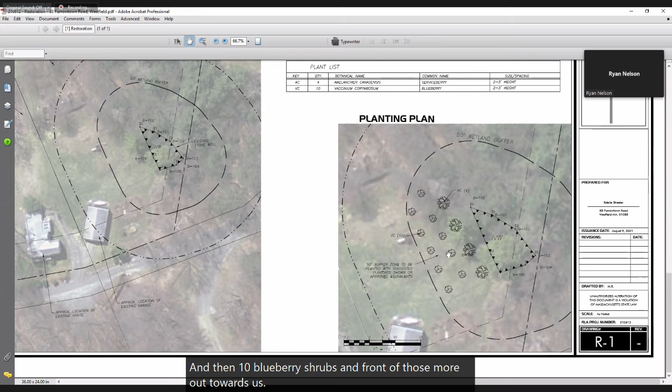So our plan for that was to put 4 serviceberries along the tree line closer to the woods, and then 10 blueberry shrubs in front of those, more out towards the center of the lawn within that 50-foot buffer zone area. Thank you. Yep. Again, just waiting for the updated plan, but any questions from the commission?

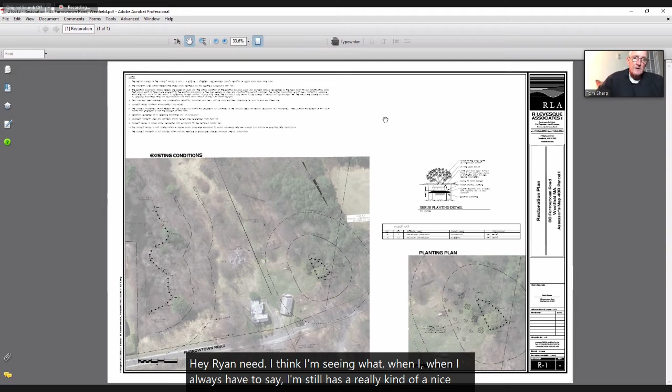Hey, Ryan, when I was at the site, Estelle has a really nice little standalone garden, and I think it's just outside the 50-foot. Am I correct? Is it that little structure? Behind the garage. She said behind the garage. I don't quite remember it. The garage is just the building. I think it's directly behind the garage, right? Right. And it is outside the 50-foot, is that correct also? Looks like it, yes.

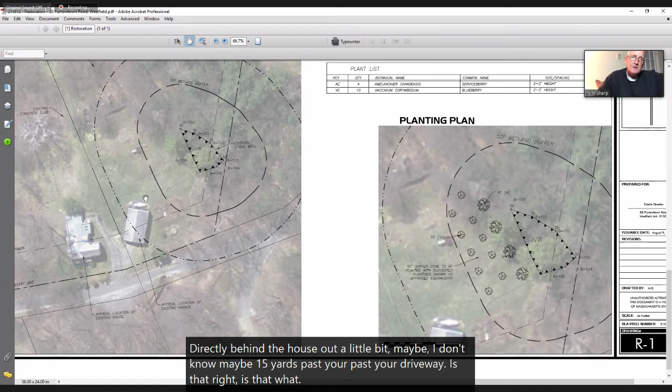And Estelle, you also had a very pretty little garden area directly behind the house, out a little bit, maybe 15 yards past your driveway. Right. Ryan, is that what I'm seeing, the white structure about in the middle of the page right now? You go straight back from the garage? This? Yeah. I'm not quite sure what that is. Estelle, what is that?

Trying to think, because there was some, where that little tree is, I can't really tell. That my magnolia tree is, I think, right around, I think this is it, but I can't tell for sure, that it's right behind. There was a concrete area, where old barns used to be, pieces of it. And that could be that. I'm not sure. Have to wait. Let me look at another map. Outside the 50. See if I can find what it is.

It does appear it is outside the 50-foot, David, and that's what I was concerned about. If not, I think we should make a condition that we're not enveloping any of her garden areas, any of these 2 garden areas, I should say. Right. I think those are outside the 50. All right, good. Then I'm okay. Yeah. All right. So everybody acceptable to the plan that Ryan has submitted? I am, Mr. Chairman.

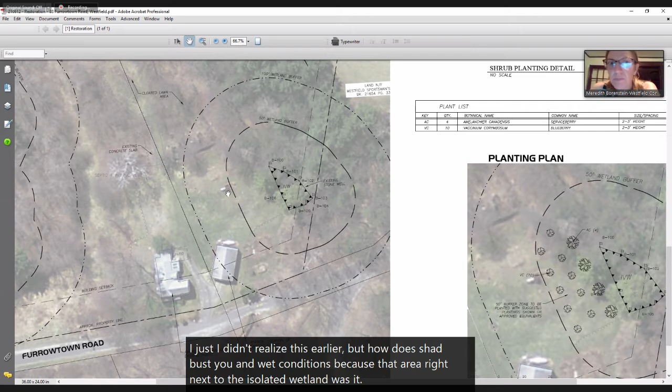Yeah, I think I have one comment. I didn't realize this earlier, but how does Shadbush do in wet conditions? Because that area right next to the isolated wetland seems to be pretty wet. I know we've had a wet year, but every time I've been out there, it had standing water. I don't know if we'd want to move them further out. I can't picture them doing well in standing water.

It's probably not standing. I haven't really walked out there, but early spring, maybe it's damp, snow melt, things like that. But I've had gardens there, and I've had the water. They don't produce enough water to sustain themselves. I just don't want to prescribe something that's not going to do well. Do you know the indicator status for Amelanchier canadensis, Ryan? Let me look it up. I have a feeling it's FAC, but I can't remember.

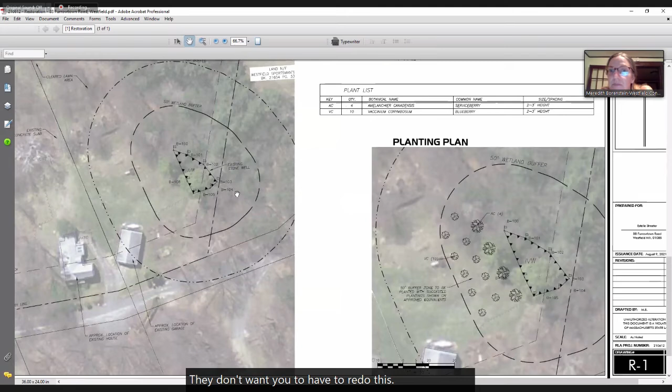Anyways, I think the blueberry shrubs will do really well there. I just wasn't sure about the Amelanchier, but overall, I think this is a great compromise. It's FAC up. Oh, okay. Yep. I don't want you to have to redo this plan again, but is anyone else concerned? Would we want to put the Amelanchier closer to the outer 50? Or what is a good vegetation that does like wet roots? Winterberry. And we've got some of that, right? Winterberry does real well in wet conditions.

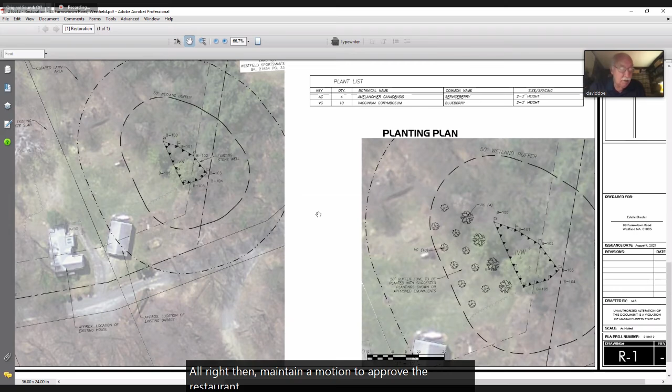Well, let's just change it then. Oh, I'm sorry. We have serviceberry. Yes. So yeah, let's change it. Is that amenable, Ryan? Yep, that's fine. Okay, let's do that then. Thanks, Bob. I think that's a good choice. And then we can approve it. I'm sure Ryan can just update that label and we could approve it tonight. All right, then entertain a motion to approve the restoration plan as submitted by RLA with Winterberry substituted for the serviceberry on the plan.

So moved. So moved. All right. I beat you that time, Carl. Yeah, you did. You're way slow, Carl. I'm getting tired, I guess.

All right, any further discussion? Seeing none, all in favor? Bob, yes. Alex, yes. Tom, yes. Cliff, Jim. Yep. Ryan, can you please move your screen? Okay, Cliff. Yes. Okay, and I'll vote yes as well. Thank you. And thank you, Estelle, for working with us.